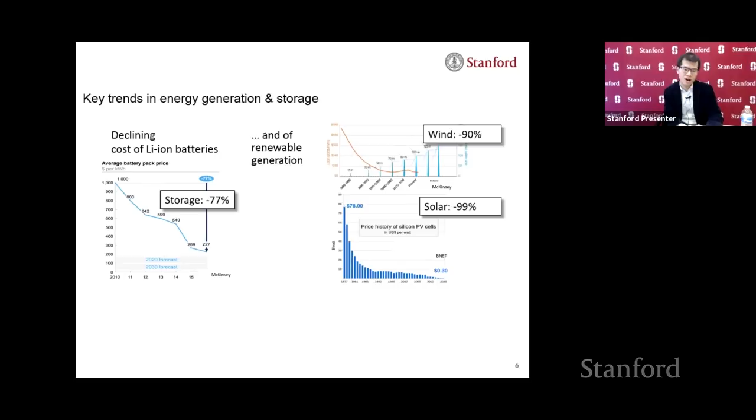On the other hand, if you look at the cost of generating electricity renewably, that cost has gone down even more. For example, for wind electricity since the 80s has gone down by 90%. And for solar, that has gone down by 99% in the past 2 decades. And if you combine the decline costs of storage and generation of renewable electricity, that leads to 2 very interesting questions. The first question is in the sector of transportation.

So what are the remaining research and development needed to fully electrify and convert our internal combustion engine fleet to electric vehicles? And a greater question and a bigger challenge is for the grid. So can we combine this low-cost renewable electricity and low-cost storage and compete with conventional electricity generated from fossil fuel purely on cost?

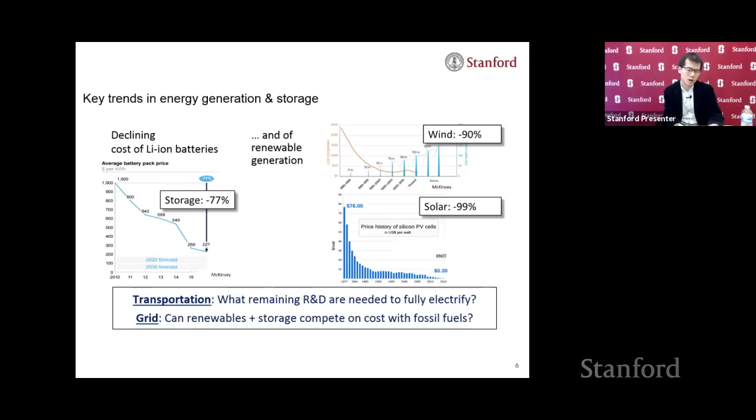So these are the 2 questions I'm going to try to give additional details on. I will discuss them both from a business perspective and also a technology perspective. And let me just state the take-home message, which is you have to look at the problem both from the business side and the technology side. So I'll go over some details in the next 45 minutes.

So let me start with a plot showing you the tremendous growth in EVs. This is plotting the millions of vehicles for the past 8 years from 2011 and projection into 2019. And you can see we sold our first million electric vehicles in 2015, then the second million in 2016, and now we have sold over 4 million passenger EVs, and within the next year, we'll add another million to that.

The numbers are big, but they are very small compared to the global industry of 1 billion vehicles. So that tells you some of the opportunities going forward in terms of fully electrifying. And I don't think I have to highlight the importance of battery technology for transportation. So I think most people can appreciate the growth of EVs. Perhaps a harder problem to see is how energy storage is impacting the electrical grid.

And here I'm showing you the global installed capacity for renewable generation. So this is showing in green for wind and in yellow for solar. And you can see over the past 18 years, the increase in this installed capacity of wind and solar has just been enormous. Now we're approaching approximately 1 terawatt of installed capacity for wind and solar. So the electricity grid is changing very quickly.

And one of the key challenges is how does the grid cope with the generation of what we call variable electricity? So these are not resources which are available all the time. The sun doesn't shine all the time and the wind doesn't blow all the time. So how do we think about changing the grid to accommodate for this variable generation of electricity is one of the key challenges going forward.

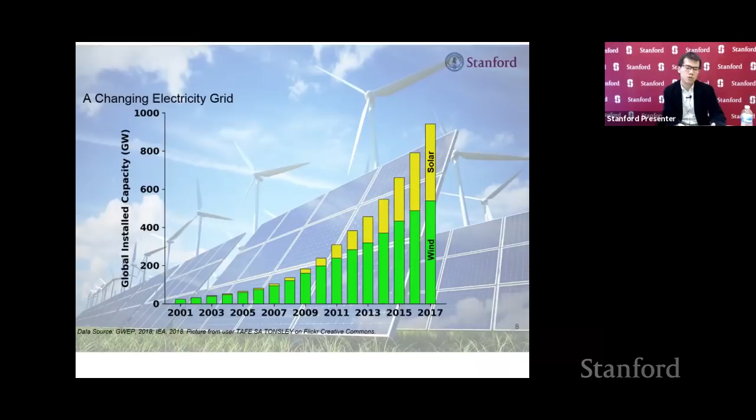So one of the key drivers for energy storage is policy. And being here at Stanford, let me start with California. So there are several very notable policies that are driving the investment in this area. For example, the mandate to have 1.3 gigawatts of installed storage by 2024, and more recently, to go completely carbon-free electricity by 2045, that was just announced 2 months ago.

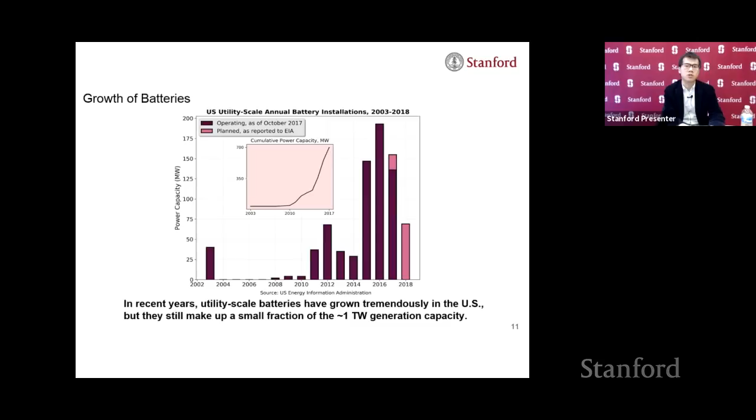So let me talk a little bit about the application of energy storage in the context of the grid. So we can all appreciate how energy storage can help with transportation in terms of electric vehicles. The grid is a much more complex system. And you can think about the utility of storage in the context of the duration of storage. So how long do you have to store electricity for in order to tackle some of these various applications?

And with recent applications, each application has a revenue associated with it. So this is driving some of the techno-economics behind storage on, for example, whether utility companies will incorporate storage or not, or do they go with traditional means of providing electricity, for example, through natural gas power plants. So let's start at the bottom. On the level of seconds, you have things like startup of the grid. So you have to provide some initial energy if the grid was down and you have to restart it.

The second one is frequency regulation. If you look at your electricity output, it is very stable, okay? But that only happens when demand and supply of electricity are perfectly matched. And sometimes it is difficult to match it, so you have to have some amount of buffering so that your electricity will come out at the right voltage and the right frequency, so 120 volts and 60 hertz in the United States.

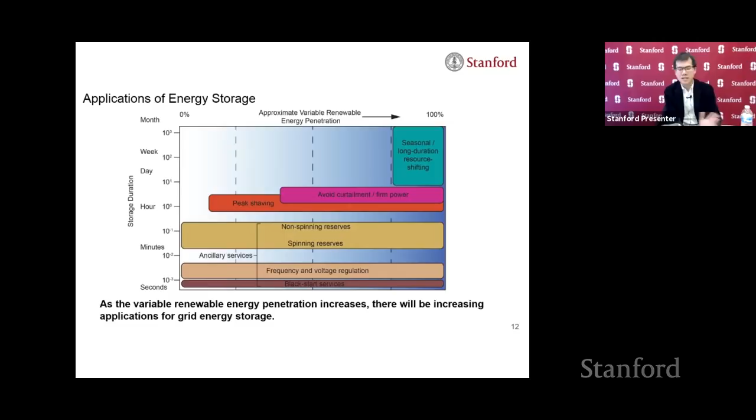So let me show you one example of a typical 1 week electricity generation here. So here we have green, it's the generation of wind. And we have here in yellow at the top line, that is the total electricity load. So if you look at the green here from left to right, you can see it's highly variable. It can be almost zero at times, and it can be very large at other times. And if you look at the load profile, the up and down reflects the cyclic demand of the day, higher during the daytime and lower during nighttime.

And where you have a peak demand and low wind output is where you have to provide electricity from something other than wind. And this is where we turn up our natural gas power plant. And on the other hand, if you have a high supply but low demand, this is where we have to curtail, which means that the electricity grid companies are paying wind farms to basically turn off the wind turbines because they cannot take the electricity. And that sometimes can result in negative pricing. So the grid companies are paying for electricity not to be generated.

And if you look in the middle of the plot, I'm highlighting two potential areas. You can, for example, shift the resources. So right around, say here, February 21st at noon, you have high wind generation. And then at midnight, you have low wind generation. So if you can move the electricity around by that 36-hour period, that can also provide additional revenue to the grid companies.

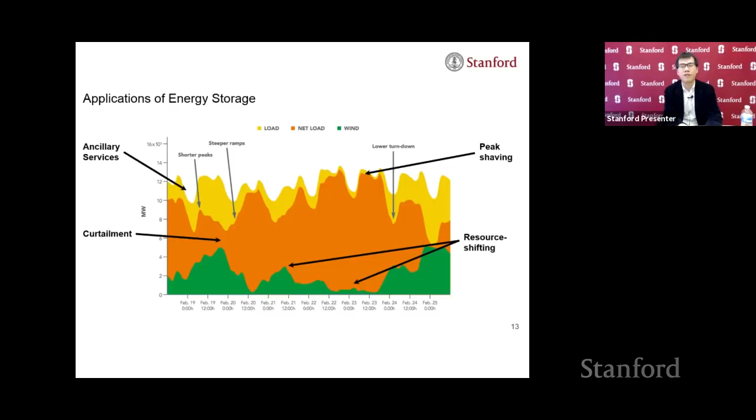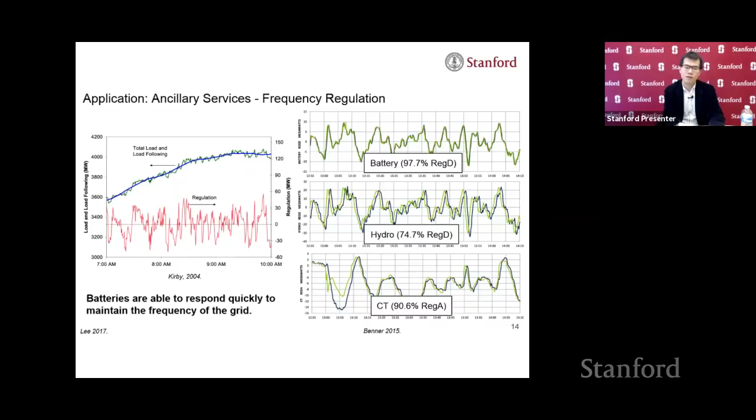So here's one example. Many of you might have heard about the installation of a 100 megawatt, 129 megawatt hour battery system in Australia that was installed by Tesla in 2017. The main application of this battery system, which is based on lithium-ion batteries, is to provide for frequency regulation, which means it's used to buffer the electricity so that the frequency is held constant. So 100 megawatt or 129 megawatt hour is not a very big number, but it is very exciting to see even a small installation like this can have a substantial impact on the type of storage used for frequency regulation.

So if you look at the plot on the right, the first bar shows you Q4 in 2017, right before the installation of this battery system. You can see battery was a very small percentage of what's used for frequency regulation of the grid, and it is mainly powered by coal and hydro. Okay, so you're using coal and water to provide the buffering needed to regulate the frequency of electricity in Australia.

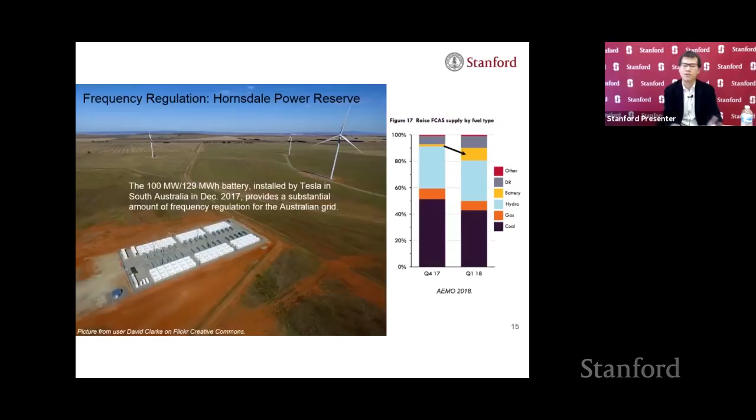But just the next quarter, so 3 months later, you can see battery grew from about 1% to over 10% as the means to regulate the frequency of electricity. So a small installation like this one can have a huge impact, and this is for Australia as a country. So this is very exciting to see how a small battery system can have such a large impact for frequency regulation.

Another application that I alluded to earlier is peak shaving. So let me get into some detail here. So peak shaving basically reflects the mismatch between the consumption of electricity and the generation of electricity. And here, because the generation of renewable electricity is variable, you have to buffer the differences between the two.

So one application of peak shaving is as follows. You have the top of the demand at about 6 p.m. This is when everyone goes home, turns on electricity, maybe turns on the AC if you're in the summer in the southern states in the US. And at nighttime, for example, the electricity demand is much lower. So one idea is that you can generate excess electricity when you have lower demand and shift it by about 12 hours to higher demand.

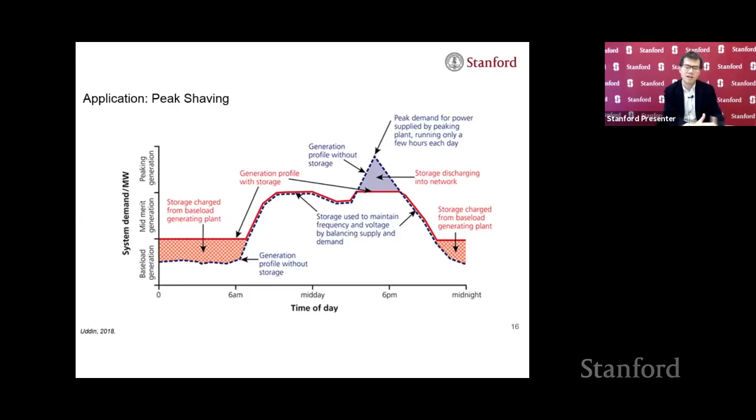One particular application could be in storing wind electricity. So wind often blows at night. So if you're able to store that, basically you can charge your battery at night, and then you discharge the battery during the day when the demand is higher. This will lessen the demand on the electricity in the peak hours. So the ability to shave this peak can stabilize the grid and make it more economical for the grid to be operated.

So one example of this peak shaving is the California duck curve. Some of you may have heard this in the popular press. The duck curve basically shows you the shape of the generation of non-renewable electricity and how it varies throughout the day. So if you look at the plot on the left, it is showing you the generation of electricity from non-renewable sources. Okay, so these are primarily your natural gas power plants in California for a typical spring day. And the curve on the top in gray is the actual in 2012. And as you go down, it shows you the prediction to 2020. And the prediction was made in 2013.

So you can see that because the solar installation was still quite low back in 2012, your generation of non-renewable electricity is fairly flat during the day. But as time went on, the solar installation increased in California, which means you're outputting much more renewable generation during the daytime. And as that renewable generation went up, the generation of conventional electricity from natural gas and others has to go down, okay? And that's why from 2012 to 2020, you're seeing the formation of the side profile of a duck, which tells you that you're needing less electricity during the day because you have more solar electricity to work with.

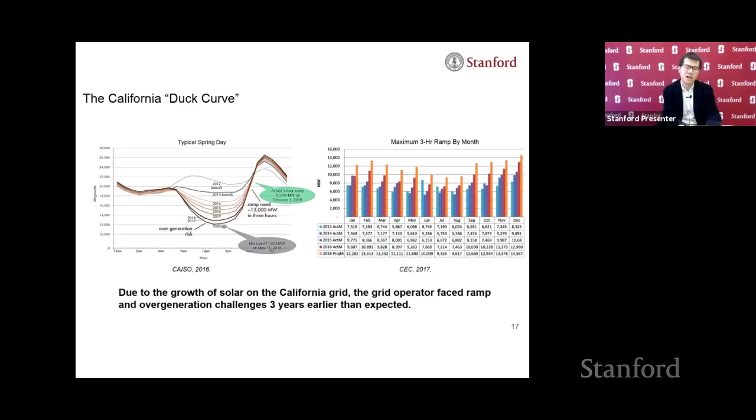How good were the predictions? Not very good. In fact, today we're already way past the 2020 projection in terms of the duck curve. So we're very close to the bottom of this curve, which means we are shutting down a tremendous amount of conventional electricity generation during the daytime, and we have to turn it back up over a 3-hour period. And the plot on the right just shows you how much ramp we're talking about, 10,000 megawatts. To put some context, 10,000 megawatts is half of the Australia grid. So in California, we have to turn up electricity that is equal to half of the grid utilization in Australia. So this duck curve is a tremendous consideration when it comes to technologies that can mitigate the duck curve.

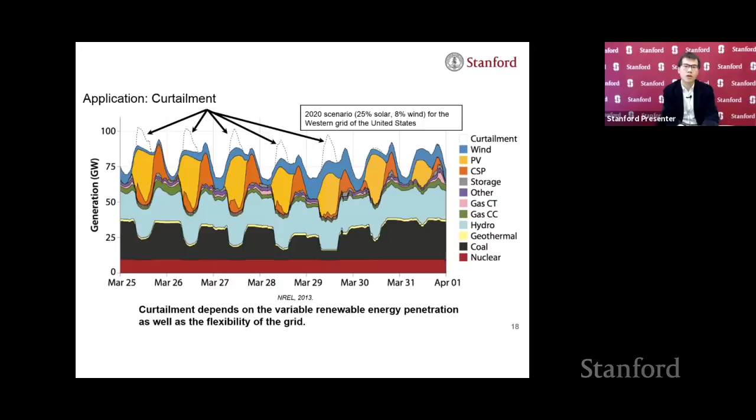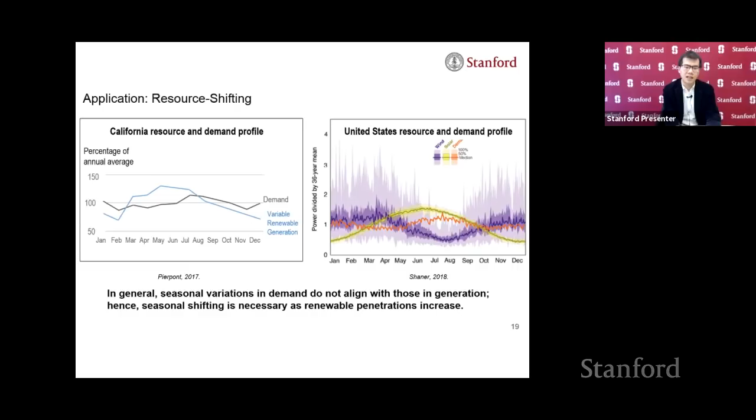So the opportunity here is, can we align our resources with our demand by shifting electricity around seasons? So can we take some of that electricity generated in the months of May to August and shift that to the consumption in the winter, okay? So this is something that is not yet possible, but seasonal shifting of electricity is a huge opportunity. And as I commented on earlier, if we want renewables to penetrate the grid completely, we have to tackle this challenge.

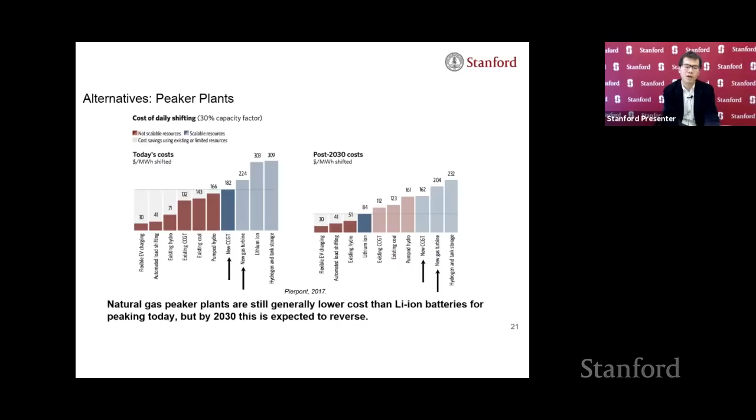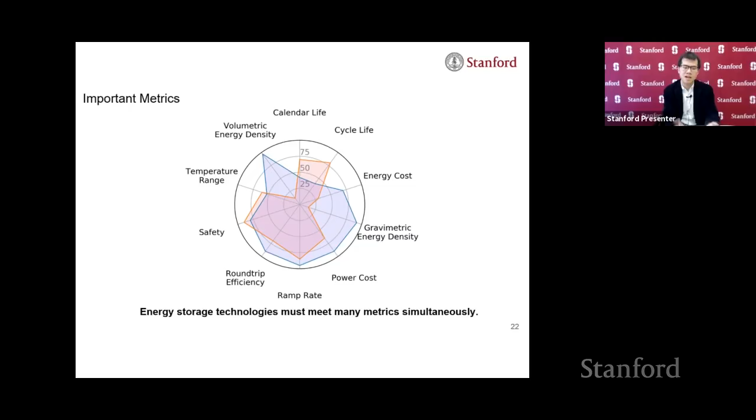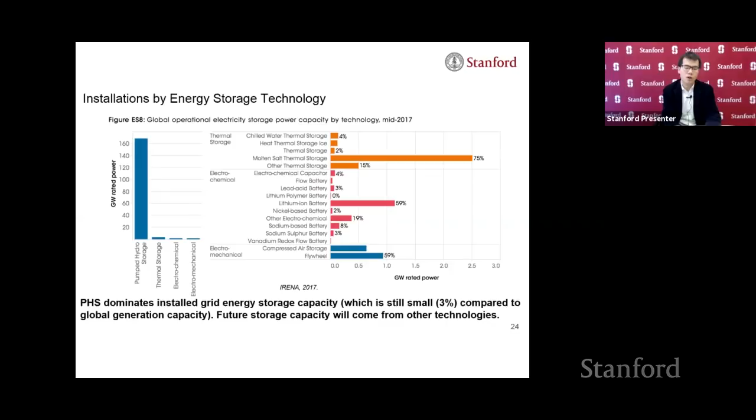The opportunity for the future is how can we develop different technology to reach the same level of economy as pumped hydro and ultimately to exceed it. And the reason why pumped hydro has limitations is because it's geography dependent and water resource is always a consideration as well. But let me get right into lithium-ion battery. This is something that has really captured the attention of the public in the past decade because of the rapid explosion of electric vehicles. A battery technology is actually fairly straightforward. You are shuttling atoms such as lithium between a low energy reservoir and a high energy reservoir.

So in a manner of speaking, this is not very different than pumped hydro, except the energy carrier is not water and pumping up a difference in height, but is really lithium that is being pumped around a difference in chemistry between the two sides of the battery, which we call the negative electrode, sometimes called the anode, and the positive electrode, sometimes called the cathode. So the ability to move this energy carrier lithium around the two electrodes is how a battery works.

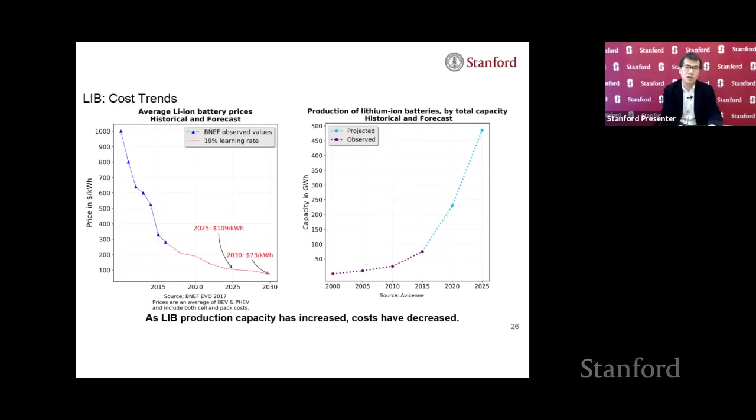As the cost goes down, new applications will come up. So as the cost goes down, you can store electricity for longer periods of time, for example, for the electrical grid, and the cost of transportation for EVs will also go down as well. And the cost decline will be matched with the growth in the installed capacity, and that is what's shown on the right. It is truly exciting to think that the lithium-ion battery market should, in the next 10 years, reach over $1 trillion worldwide.

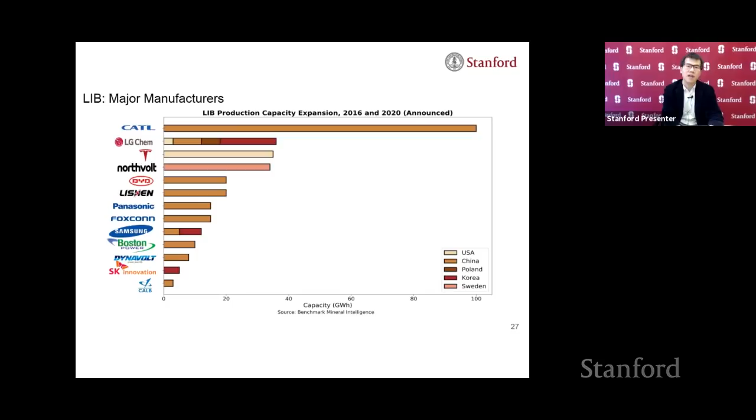This is a plot showing you the companies which are involved in manufacturing lithium-ion batteries. A majority of these companies are in China, some of them are in Korea, and elsewhere in the world as well. And most companies have been announcing new capacity, so this plot is already outdated, and we're seeing numbers even larger today in order for the industry to meet the demands for transportation and increasingly for grid storage applications for lithium-ion batteries.

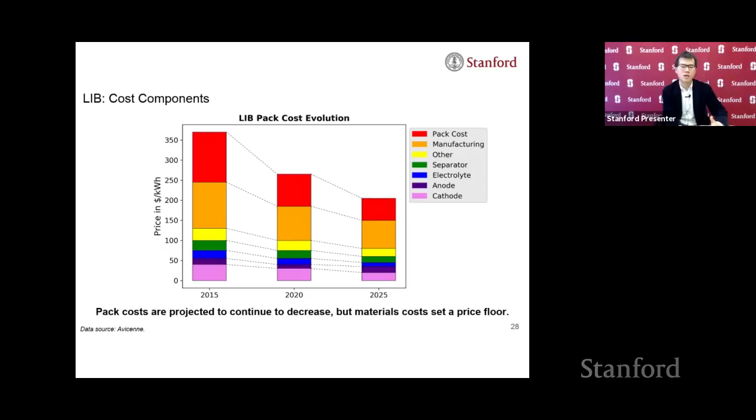So what is the ultimate limit of the cost of lithium-ion batteries? So I showed a projection down to $109 and $73 a kilowatt hour. So fundamentally, what sets the floor of the cost of battery technology is the material cost. So this bar shows you the projection of costs from 2015 to 2025. So you can see the cost of manufacturing, the cost of assembling the batteries into a pack will continue to go down. But the cost of the material will not decrease dramatically. So the material costs will set the cost floor. So basically, if you look at the projection going forward to 2025, the material costs will dominate the cost of the battery pack.

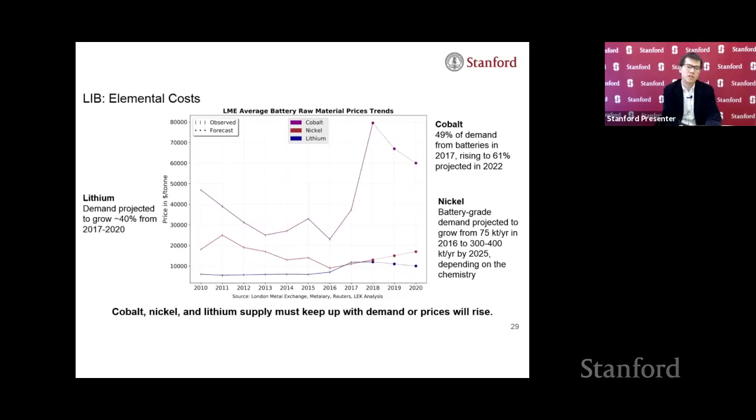Another thing to think about for batteries is cost that is levelized by the lifetime. So the cost I've been showing so far is levelized only by the energy, so dollar per kilowatt hour. But different battery technologies have different lifetimes. So for transportation, we need maybe 1,000 cycles. So if you think about a car with a 250-mile range, 1,000 cycles means it's 250,000 miles, and that likely exceeds the lifetime of cars in most use cases. But for grid application, we need much more. We need thousands or 10,000 cycle life.

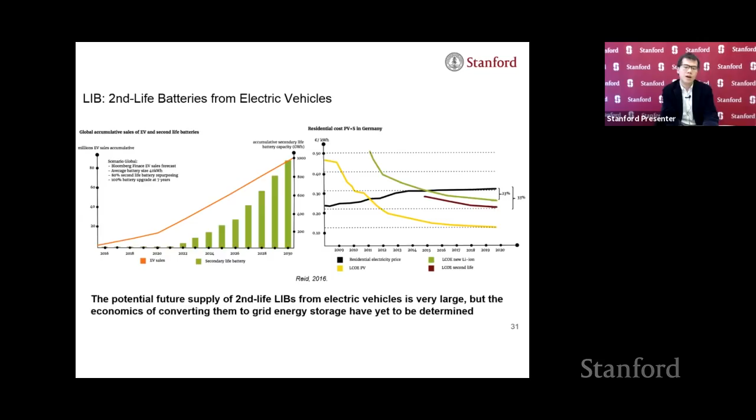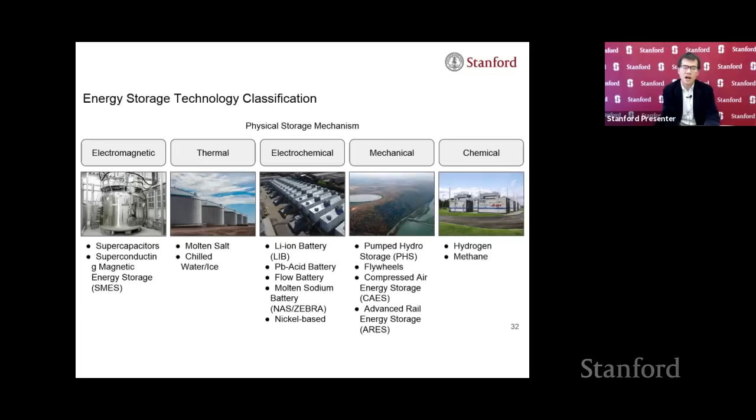So I'm out of time today, so maybe I would just say a few more words. I didn't have time to get into the specific technologies here. The take-home message here is there are a lot of different technologies, and each one of them will have different metrics. It will not meet all the requirements. There's no silver bullet. R&D is ongoing for everything I'm showing you here and more.